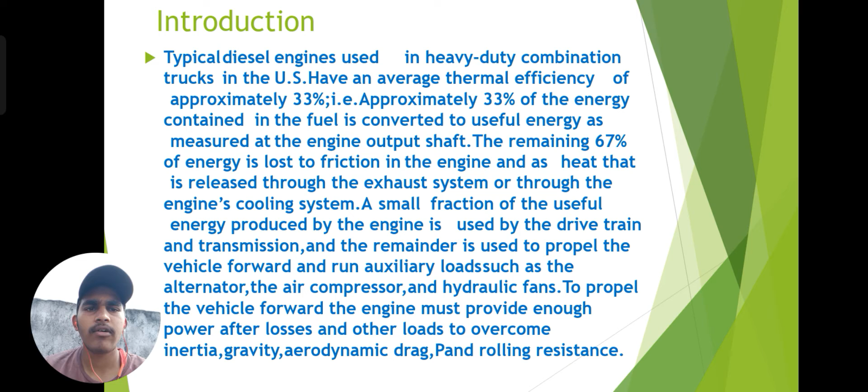A small fraction of the useful energy produced by the engine is used by the drivetrain and transmission, and the remainder is used to propel the vehicle forward and run auxiliary loads such as the alternator, the air compressor, and the hydraulic fans. To propel the vehicle forward, the engine must provide enough power after losses and other loads to overcome inertia, gravity, aerodynamic drag, and rolling resistance.

Once a truck is moving on a level road, the use of energy is different than average conditions. As an example, figure 1 shows the percentage contribution of various energy uses for a typical combination truck in the United States operating at highway speeds on a level road. In this case, 40% of the energy contained in the fuel burned by the engine is turned into useful work as measured at the engine output shaft.

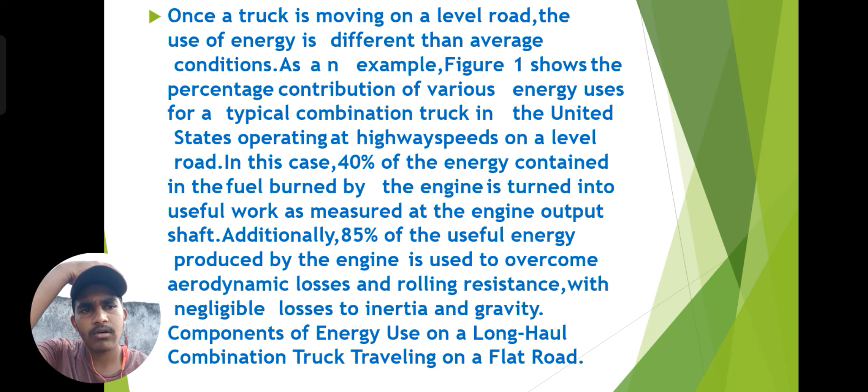Additionally, 85% of the useful energy produced by the engine is used to overcome aerodynamic losses and rolling resistance, with negligible losses to inertia and gravity. This figure shows components of energy used on a long haul combination truck traveling on a flat road.

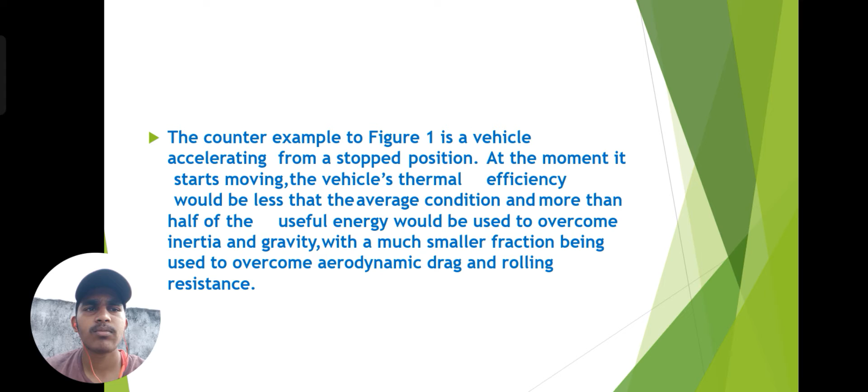The counter example to figure 1 is a vehicle accelerating from a stopped position. At the moment it starts moving, the vehicle's thermal efficiency would be less than average, with more than half of the useful energy used to overcome inertia and gravity, and a much smaller fraction used to overcome aerodynamic drag and rolling resistance.

Since long-haul combination trucks spend the majority of time operating at a high, relatively constant speed, strategies to improve their energy efficiency should focus on reducing rolling resistance and reducing aerodynamic losses, two areas that account for about 85% of energy used in a moving vehicle. These two areas are particularly attractive because a number of relevant technologies are commercially available, and most of these technologies can be used to retrofit vehicles.

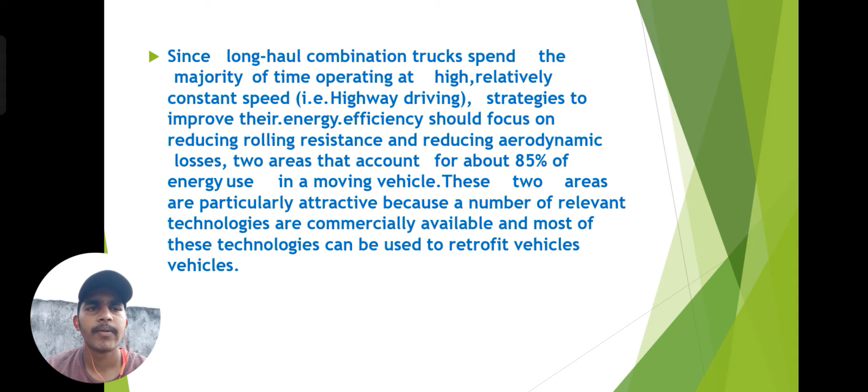The power delivered by the engine is finally made available at the drive wheels as propulsive force. The propulsive force or tractive effort available at the contact between the driving wheels and road should be more than the total resistance for the motion of a vehicle. The surplus tractive effort contributes to acceleration, climbing gradient, etc.

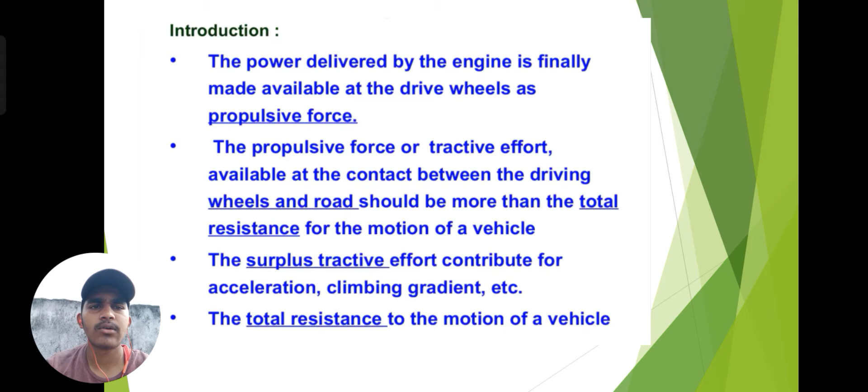The total resistance to the motion of a vehicle is air resistance and rolling resistance. The vehicle drag is a force which resists motion and is due to, first, the deformation of the wheel and ground, and second, aerodynamic effects of airflow over the vehicle. The pneumatic tires are most suitable for road transport vehicles. The deformation of tires accounts for 90 to 95% of the rolling resistance of the vehicle.

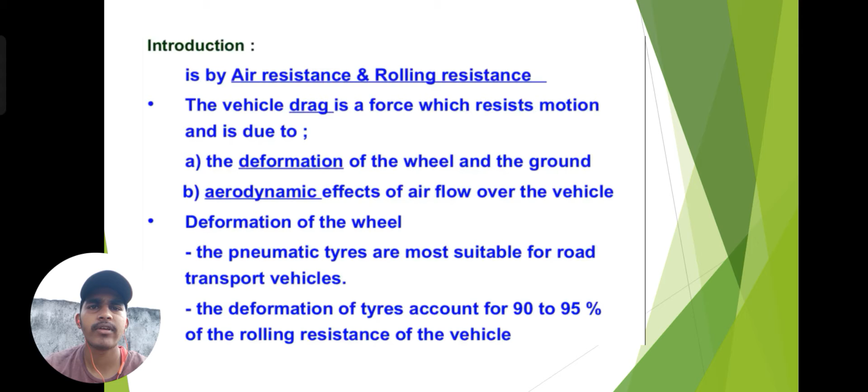Aerodynamic forces and moments: the profile of the vehicle is the principal component of aerodynamic drag and is governed by the way in which the vehicle disturbs the airstream. Its behavior has been found not to accord with established aerodynamic theory evolved in aviation, since the vehicle has to maintain contact with the ground.

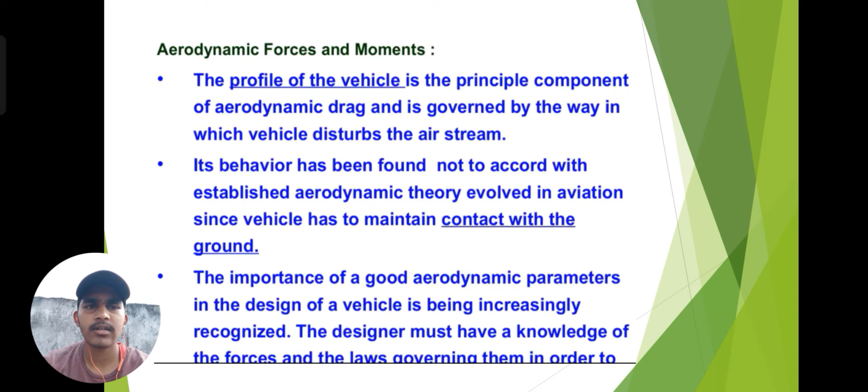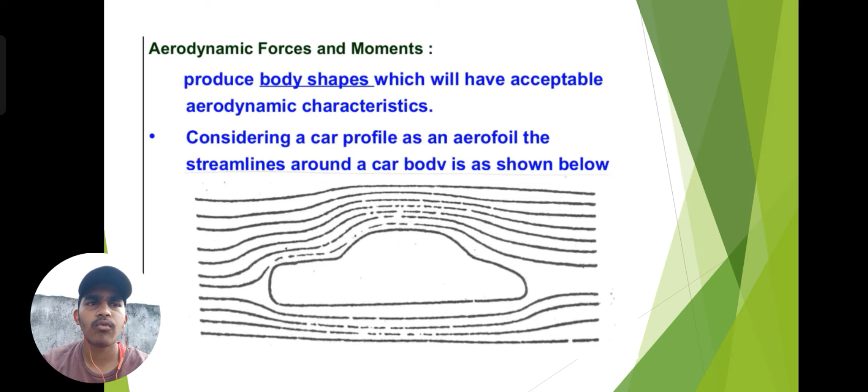The importance of a good aerodynamic parameter in the design of a vehicle is being increasingly recognized. The designer must have knowledge of the forces and the laws governing them in order to produce body shapes which will have acceptable aerodynamic characteristics. Considering a car profile as an aerofoil, the streamlines around a car body are shown below. This figure shows the aerodynamic forces on a vehicle in a real environment.

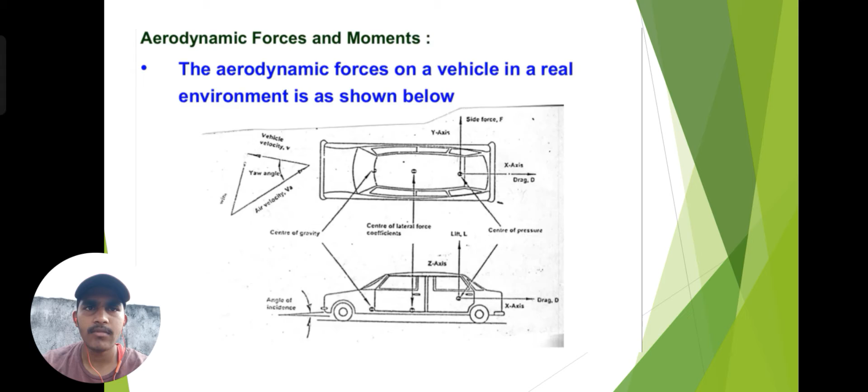Therefore, we consider drag force Px equal to half rho v squared A CD, where Px is the aerodynamic drag force in units of kgf. Rho is air density, v is velocity, A is frontal area of the vehicle, and CD is the aerodynamic drag coefficient.

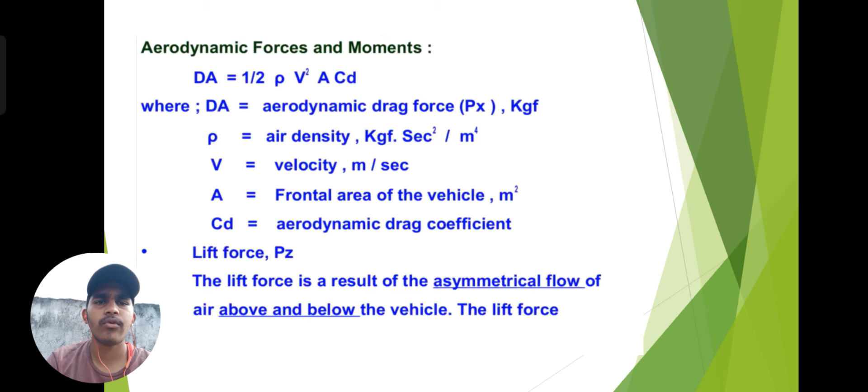Lift force Pz: the lift force is a result of the asymmetrical flow of air above and below the vehicle. The lift force affects the vehicle's driving stability and is measured at the center line of the vehicle at the center of the wheel base. That is, Pz equal to half rho v squared A Cz, units kgf, where Cz is the lift coefficient.

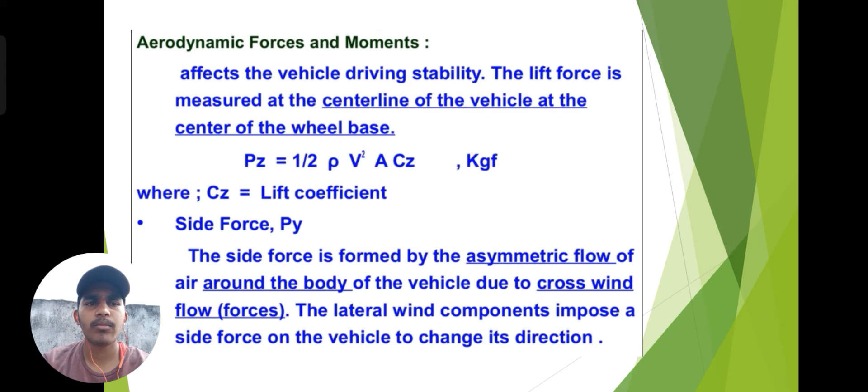Side force Py: the side force is formed by the asymmetric flow of air around the body of the vehicle due to cross wind flow. The lateral wind components impose a side force on the vehicle to change its direction. Side force acts on the body at the center of pressure. Py equal to half rho v squared A Cy, units kgf, where Cy is the cross wind force coefficient.

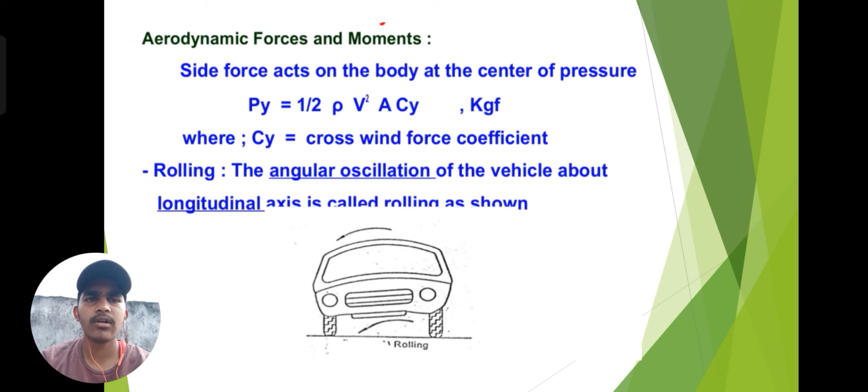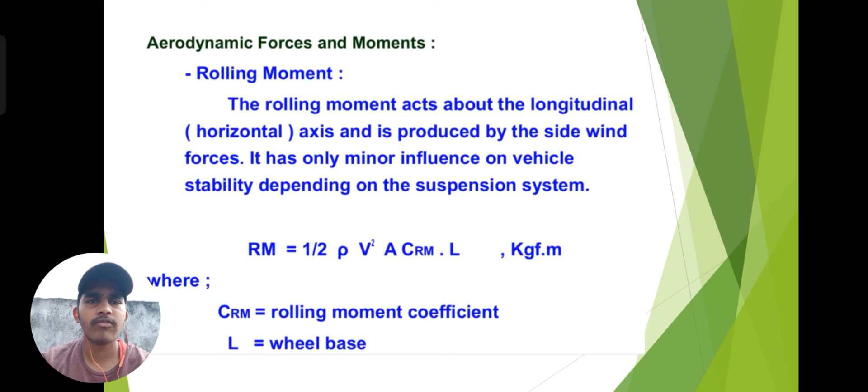Rolling: the angular oscillation of the vehicle about the longitudinal axis is called rolling, as shown below. Rolling moment: the rolling moment acts about the longitudinal axis and is produced by the side wind forces. It has only minor influence on vehicle stability depending on the suspension system. That is, Rm equal to half rho v squared A Crm into L, in kgf dot m, where Crm is the rolling moment coefficient and L is the wheel base.

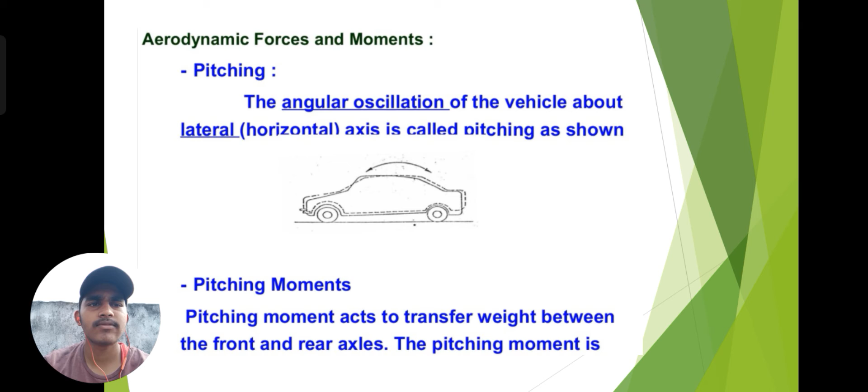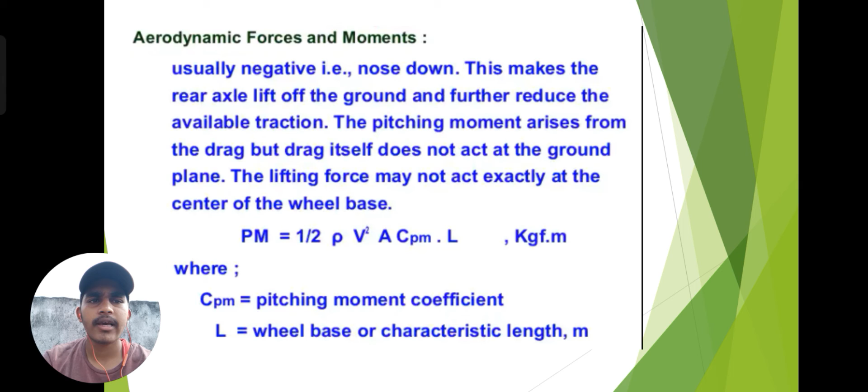Pitching: the angular oscillation of the vehicle about the lateral axis is called pitching. Pitching moments act to transfer weight between the front and rear axles. The pitching moment is usually negative, that is nose down. This makes the rear axle lift off the ground and further reduces available traction. The pitching moment arises from drag, but drag itself doesn't act at the ground plane, and the lifting force may not act exactly at the center of the wheelbase. Pm equal to half rho v squared A Cpm into L, units kgf into m, where Cpm is the pitching moment coefficient and L is the wheelbase or characteristic length in meters.

Yawing: the angular oscillation of the vehicle about the vertical axis is called yawing. It is the vertical movement of the complete vehicle body, so the complete body rises up and down, known as bouncing.

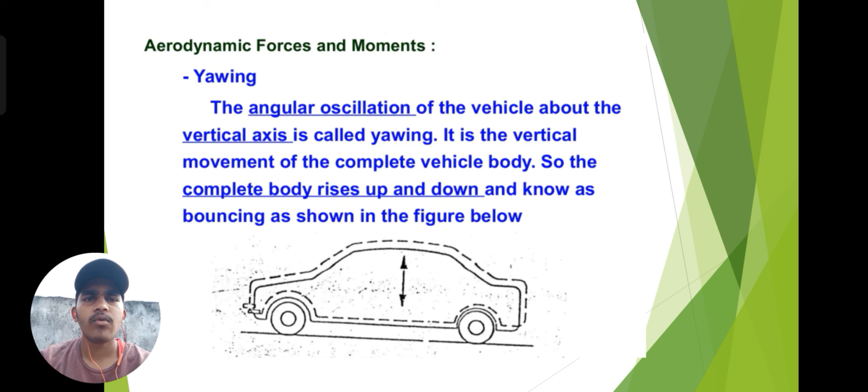Yawing moment: the lateral force caused by a side wind doesn't act at the mid wheel base position. A side wind will produce a yawing moment tending to turn the vehicle away from the direction of motion. Yawing moment is defined as Ym equal to half rho v squared A Cym into L, units kgf into meters, where Cym is the yawing moment coefficient and L is the wheelbase or characteristic length in meters.